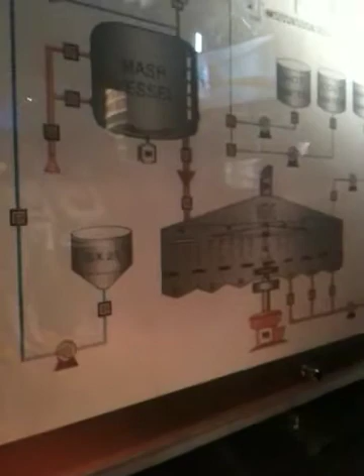...is used by Guinness. 80% is malted, 10% is unmalted, 10% is roasted barley. So that goes to the mill, and we crush it down into really fine powder. It's called milled barley at this stage, or grist, G-R-I-S-T. You can see it there. So it comes along the grist elevator, and all the milled barley then is kept in the storage house. Then we keep them here until we're ready to start the brew.

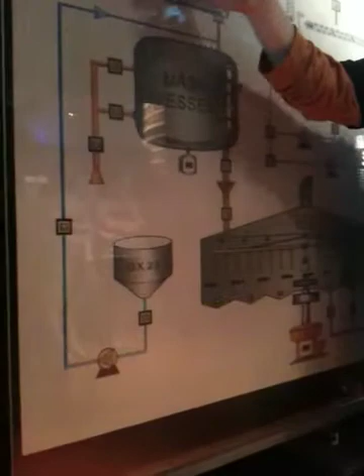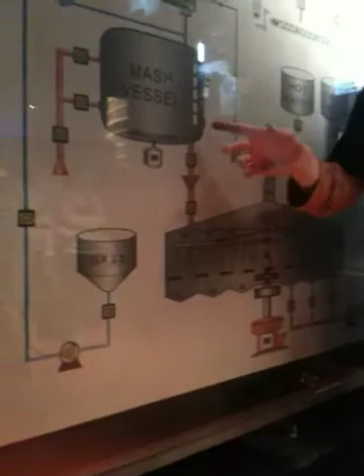So when we're ready, we release the barley into the mash vessel. This is where the brew really begins. This is where we add the second ingredient in Guinness, the water, for the first time. So it's kept in here for 2 hours at 62 degrees Celsius. Now, what happens in here is all the nutrients and starches from the barley get transferred into the water. So all the goodness goes into the water.

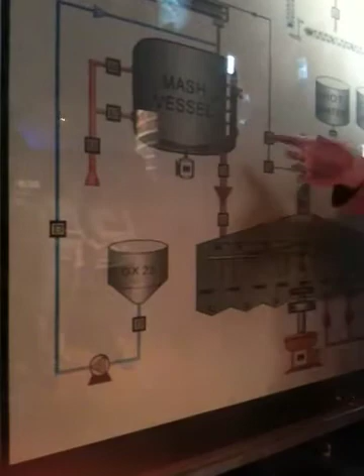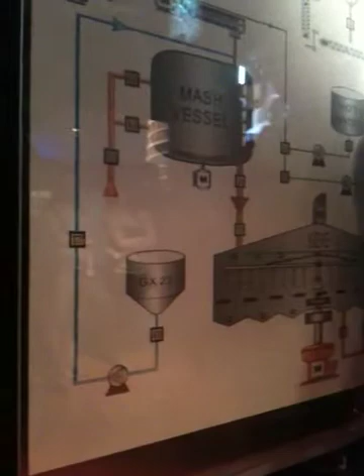We keep it in here at 62 degrees Celsius. That's why we have hot and cold water. If it goes any higher, we have the cold water. If it goes lower, we have the hot. So constant temperature is the best for transferring all the nutrients. So it leaves here, and it's the exact same as porridge at this stage. You know, that kind of thick substance.

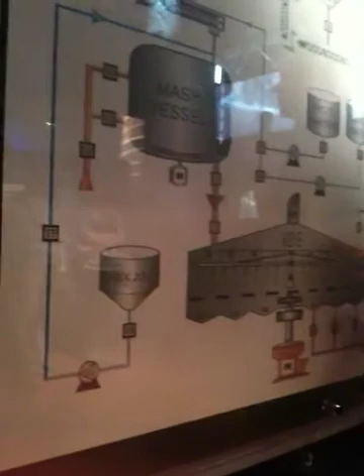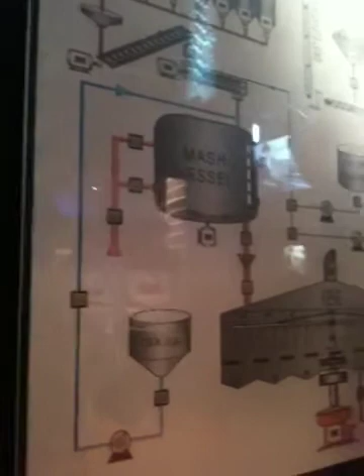It goes into the kieve. And the kieve is a Dublin word for a sieve. Basically, it's a big filter. You would have seen the kieve just down there before you came up to me. So the porridge-like material comes into the kieve and spends 6 hours in here. Now what happens is, you see the two arms here, they just spin around the whole time, separating the solids from the liquids.

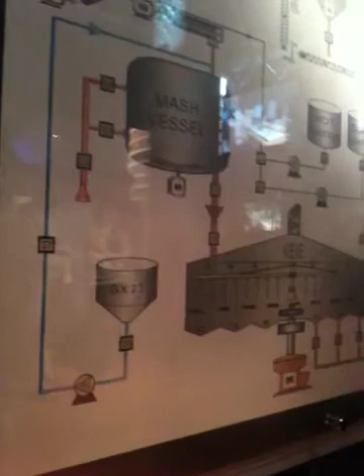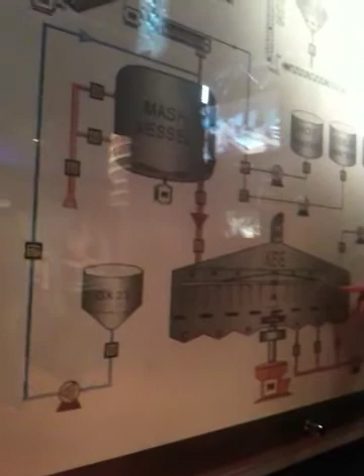So at the end of the 6 hours, this is all done, and the liquid is drained out, and it's called wort at this stage, W-O-R-T. It's really, really dark and very strong brewed sugars. It's about 80 to 90% sugar at this stage. So the barley that's left behind is now called spent barley. Nothing in the Guinness process is wasted. So what we actually do is we sell the spent barley on to farmers for animal feed or pig feed.

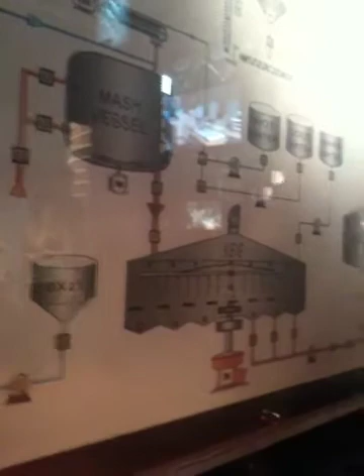So back to the wort. It comes along and goes to the kettle. Now if the kettle is being cleaned or still in use from a previous brew, it goes to the underback. The underback is just a storage vessel. Nothing is added, nothing is taken away. So it's not really an important part of the brewing process. So we move on there.

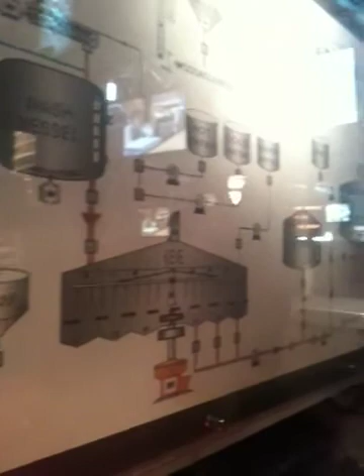So the wort goes into the kettle. The kettles we use are just like the ones behind you there, except we no longer use copper kettles. We use stainless steel, purely because they're easier to clean and they don't rust. And they actually quicken up the whole brewing process as well. So the kettle is where we add the hops for the first time. We put the hops in and we mix it with the wort. We boil it at 105 degrees Celsius for about 80 to 90 minutes.

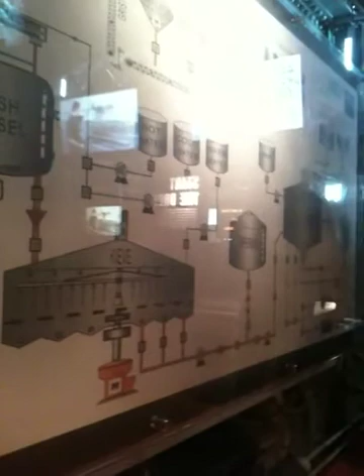Now it's really, really strong flavours at this stage. Sometimes you walk around Guinness and you get a smell in the air. It's this stage you're smelling, really strong flavours. So it leaves here after the 80 minutes. It goes through a series of coolers. It's brought down to 25 degrees Celsius. Then it goes to the FBP. Now the FBP is short for fermentation and brewing plant.

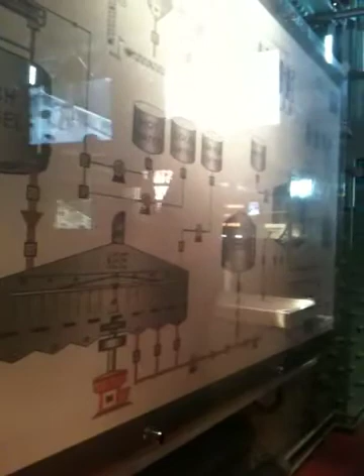The brew goes into a fermentation vessel, just like the one behind you there, about the same size. When you go upstairs, you're going to see how big the vessels actually are. But again, we don't use wood anymore. We use stainless steel for the aforementioned reasons. So this is where we have the fourth ingredient, the yeast. The yeast is amazing. We were seeing it down below. It actually feeds on all the sugars and starches and turns it into alcohol. So it's my best friend. So after about 2 days, it's all turned into alcohol at this stage.

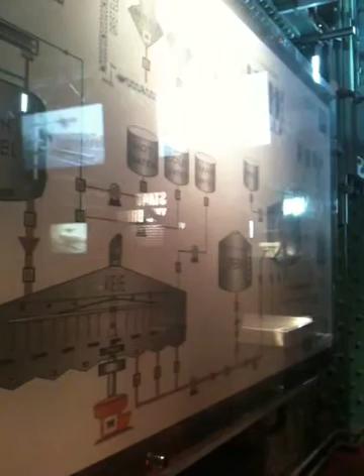Now, we remove the yeast by what we call centrifuge. You would have heard of centrifugal force. Basically, the vessels get spun around really fast and the yeast gets stuck to the side. And we drain out the brew, and we actually don't waste the yeast. We use a bit of it again in the next brew, but we can actually sell the yeast out to food production companies. I'm sure you see a Marmite or Vegemite, and you see the yeast extract, and that's where it actually comes from.

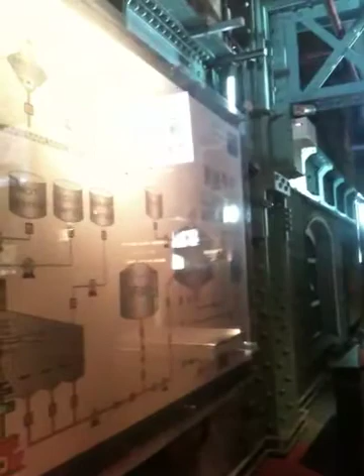So the brew then goes into maturation vessels, just like the one around to the left there, and after 60 to 65 hours, it's now Guinness. So this whole process takes 8 days. Results in about 5,000 kegs, and each keg is about 90 pints. So I'm not going to do the maths on that, but it's quite a lot. So the brewery itself brews over 1 billion pints of Guinness a year. So you can get an idea of how many of these we do.

So guys, from here you're going to see the fermentation process, and upstairs there's a taste area where you get a sample of Guinness. So enjoy that. If you have any questions, please feel free to ask. Thank you. Thanks.